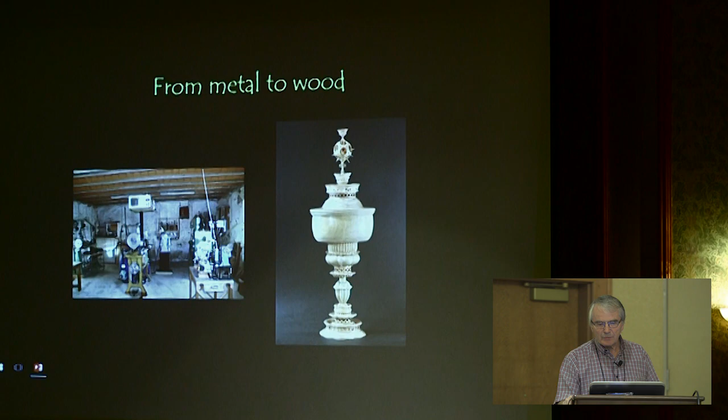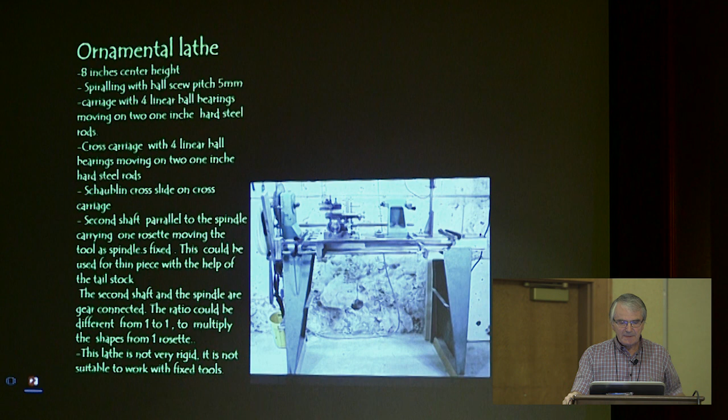So this is my ornamental lathe. It was a kit French lathe made of aluminum, and the base, the foot are made of metal sheet, and the bed is made of aluminum profiles. So I repeat, the center height is 8 inches.

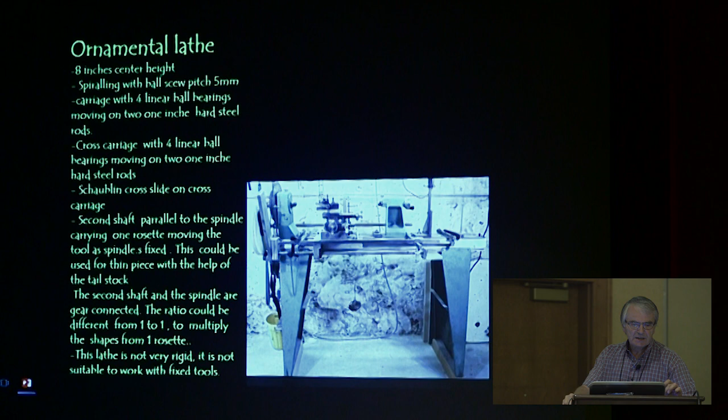I can, with this ornamental lathe, make spiraling. I have a ball screw with a pitch of 5 millimeters. The carriage with 4 linear ball bearings moving on 2 1-inch hard steel rods, it's not 2 inches. The cross carriage has 4 linear ball bearings moving on 2 1-inch hard steel rods.

I have on this carriage a Schaublin cross slide. I have a second shaft behind the lathe, which carries 1 rosette, moving the tool with the spindle fixed. Something is not clear here. This could be used for thin pieces with the help of the tailstock, because I have no rocking movement.

The second shaft and the spindle are gear connected. The ratio could be different from 1 to 1 to multiply the shape from 1 rosette. This lathe is not very rigid. It's not suitable to work with fixed tools. If you have any question, you can ask me. I will try to answer.

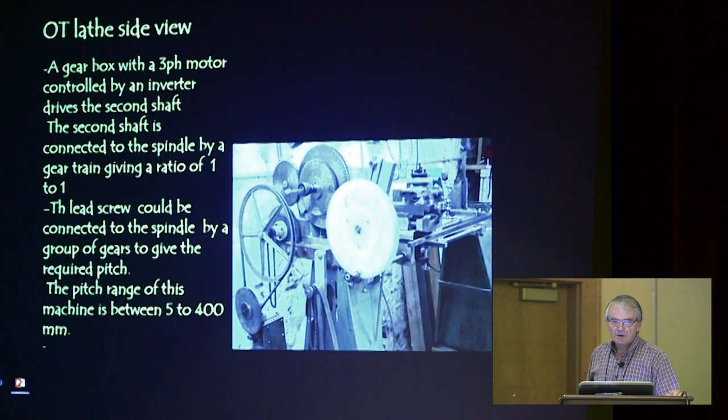This is the side view of the ornamental lathe. A gearbox with a 3-phase motor controlled by an inverter drives the second shaft. The second shaft is connected to the spindle by a gear train ratio 1 to 1, and the lead screw could be connected to the spindle by a group of gears to give the required pitch. The pitch range of this machine is between 5 to 400 millimeters, which allows to make a very long spiral pitch.

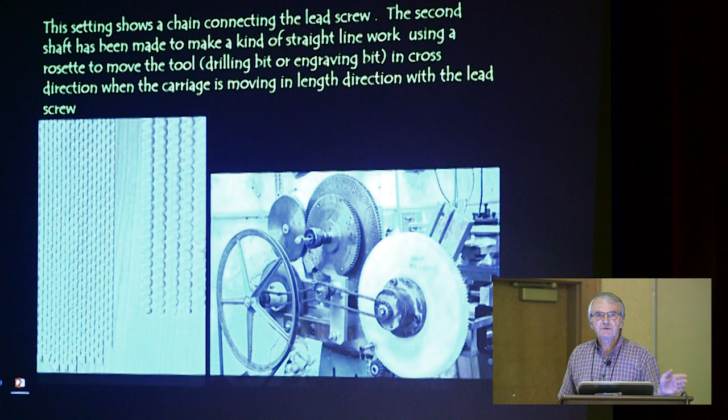Do you have any question? No, I continue.

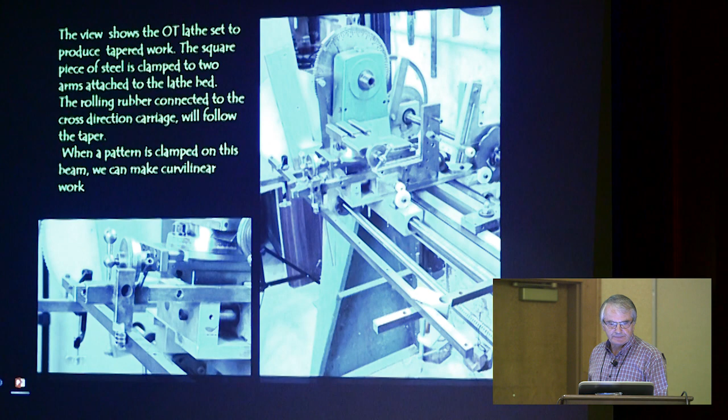The cross slide I use, at the beginning I have been using a very old cross slide coming from a French lathe. It was a bit worn out, and then I have bought a second-hand Schaublin cross slide, which is very good, probably equal to the American Hardinge you use, yes. It's generally used on a 102 Schaublin lathe.

We can sometimes find this kind of cross slide for about $500 US, but it's not very often. It's a very high quality level cross slide which works with an accuracy, a precision of a 100th of a millimeter, which is more than enough for woodworking.

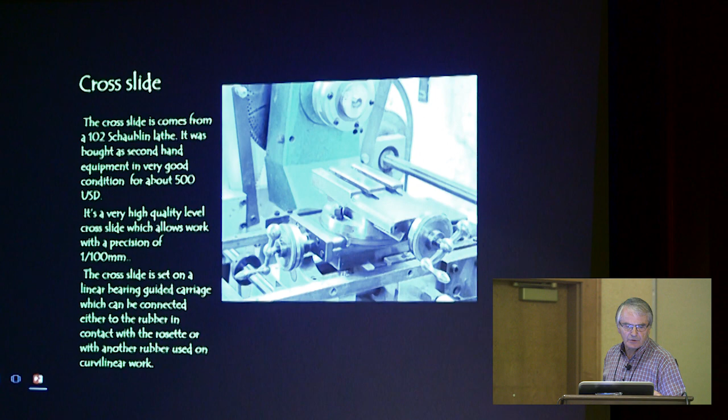The cross slide is set on a linear bearing guided carriage which can be connected either to the rubber in contact with the rosette or with another rubber used on the curvilinear work. This Schaublin cross slide has a tilting table which could be used in some special situations to set the cutting tool at the right angle or place.

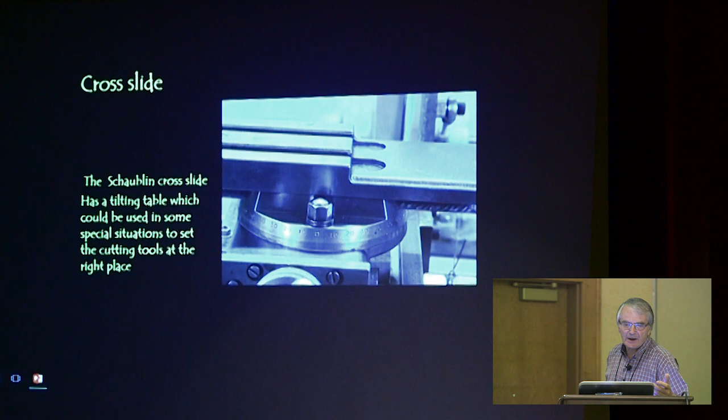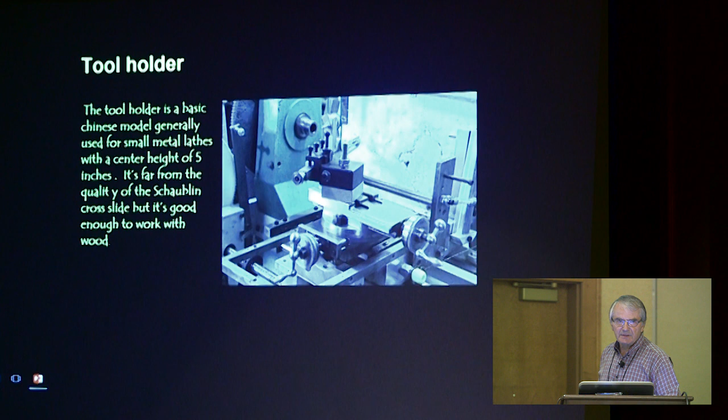The tool holder. The tool holder I use is a very basic and cheap Chinese model, which is generally used for a very small metal lathe with a center height of 5 inches. It's far from the quality of a Schaublin cross slide, but it's good enough to work with wood. I've seen that generally you use a stronger tool holder here, better than the one I use.

The universal cutting frame, mostly made of aluminum, except the high-speed steel homemade cutters. The thickness of the cutters is 3 mm and the maximum width is 10 mm. The center height is adjusted with the tool holder and the angle is adjusted by tilting the head. The aluminum block under the head is used to set the cutting frame on a rose engine.

The screw on the top of the head is used to set a sewing machine motor where the overhead drive is not available. I have an overhead drive only on my ornamental lathe, but when I use this cutting frame on my rose engine, where I do not have any overhead, I use a sewing machine motor, which is very cheap with high speed, easy to work with and easy to adapt.

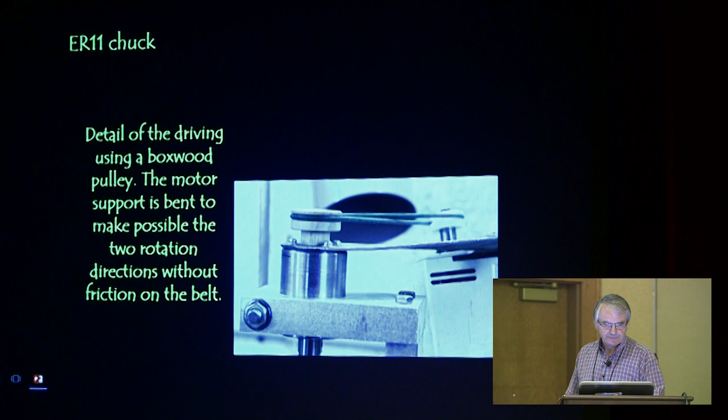This is another example of drilling chuck, which is a bit bigger. It's an ER16 drilling chuck, which could reach a diameter of, if I remember well, 10 millimeter, yes. Same system, I use the same frame with a 43 millimeter bearing.

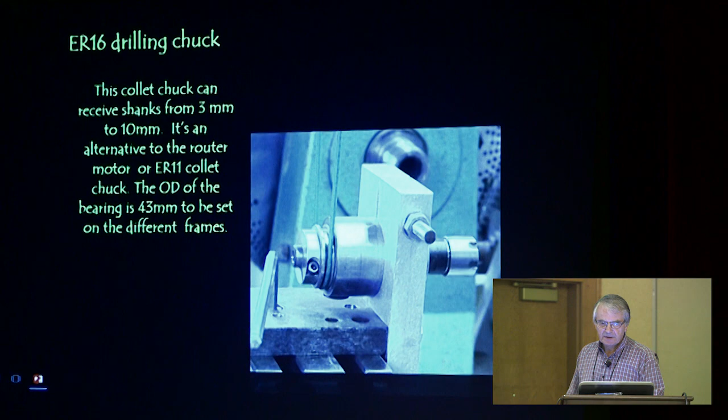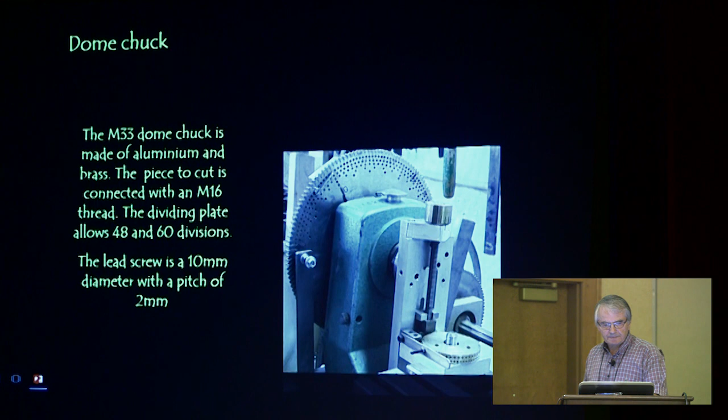Here it's my dome chuck. This dome chuck fits on the spindle by an M33 connection. It is a standard in Europe, and it is a standard I have used on all my lathes, plain lathe and also ornamental lathe. I use a dividing plate with two rows, one with 60 divisions, one with 48 divisions, and I can adjust the height of cutting to do that.

Here is my eccentric chuck, which is made of aluminum, steel and plastic. The connection I use for the dome chuck and for the eccentric chuck for the piece is M16. It's something easy to work. I can tap boxwood with an engineering tap without any problem. So this is what I use.

This eccentric chuck could have an eccentricity of 20 millimeter, and the dividing plate inside has 60 divisions. The travel of the eccentricity is made by a screw with a pitch of 1 millimeter, so I can adjust the eccentricity with good accuracy.

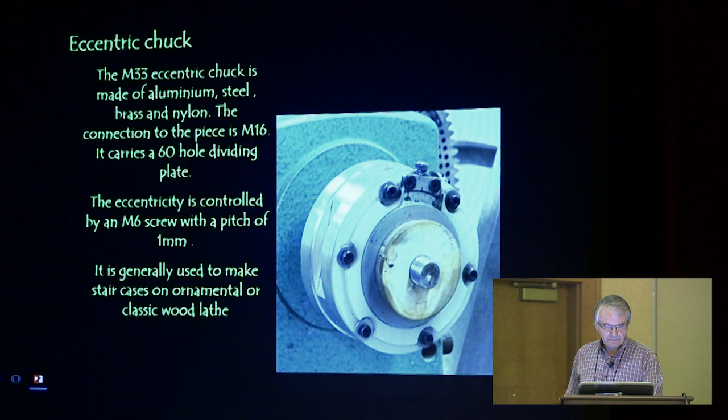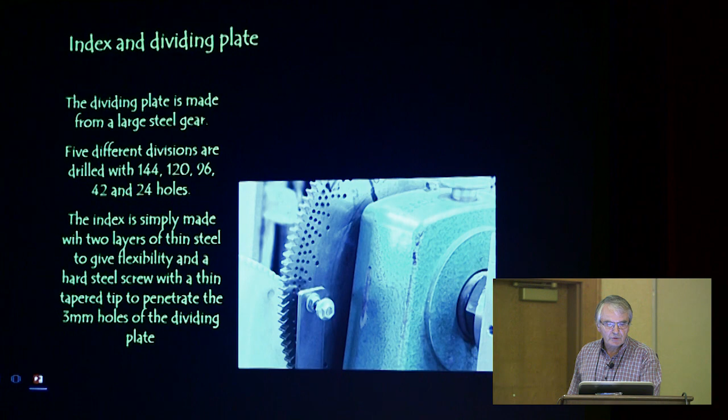This is the index and dividing plate. On the lathe, as a plate, I have used a big gear collected from an old machine, and I have drilled several rows of holes: one with 144, the second with 120, then 96, then 42, and 24 holes. The index is simply made with two thin steel bars, which are flexible enough, and a screw is used to go in the 3 millimeter holes of the dividing plate.

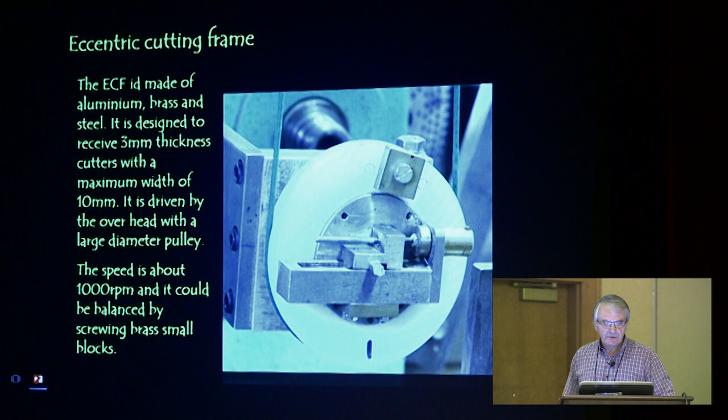Here it's the eccentric cutting frame I have made. It's a big plastic pulley, which can receive some balancing weight. The part which holds the tool has a capacity of 10 millimeter width for the tool, and I have a 3 millimeter threaded rod with a pitch of 0.5 to adjust the radius of the eccentric cutting frame.

Here it's another view of the cutting frame, which shows the pulley, the balancing weight, and the travel of the tool. This is a view of the milling attachment you have seen before with the router motor.

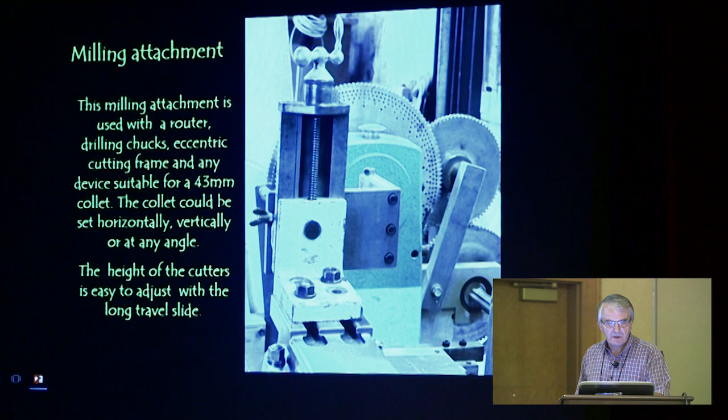The interest of this is I can work with it like a big universal cutting frame, on which I can move, change the angle, and move the center if necessary.

This is now how I work with this ornamental lathe as a rose engine. I have a second shaft behind the lathe, carrying the rosette. I did that in 2007 to make my first rose engine.

At the beginning, I used some plastic rosette made of perspex and cut with a laser cutter. The quality was good enough to work with a big diameter rubber.

So I used the second shaft, which I don't know the name of in English. It's not square, it's a shaft used on transmission for tractors and tools.

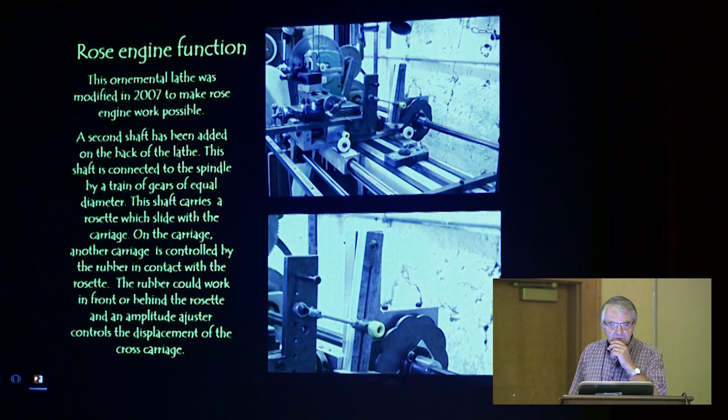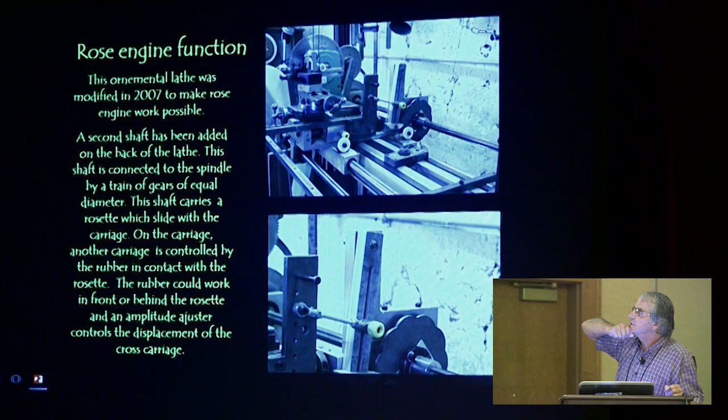I have the connection: the cross direction carriage is connected to the rosette by a threaded rod, and I can adjust the amplitude by moving the link. The link, connected to the rubber with a yellow button, can be moved up and down to adjust the amplitude of the travel.

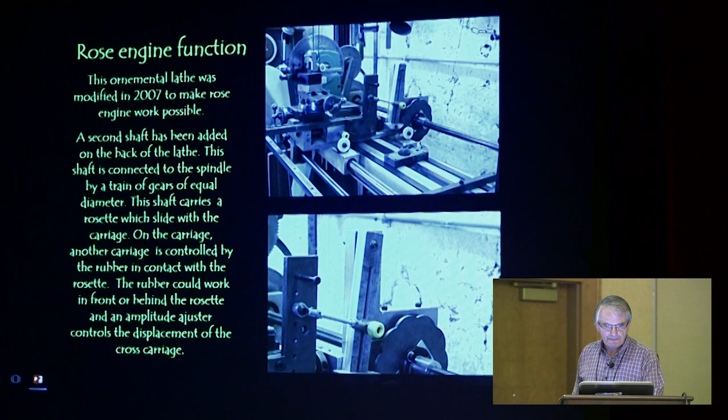To have a horizontal position of the link, I can move the link up or down through several threaded holes. With this device, I can adjust the amplitude from 20 to 100%, and it's rather accurate.

You change that yellow button on the rosette to different sizes? The yellow rubber? No, the yellow button isn't the rubber, it's just a button to tighten the position. The rubber is the piece of clear aluminium you have sharpened here. Ah, I see, okay, thank you.

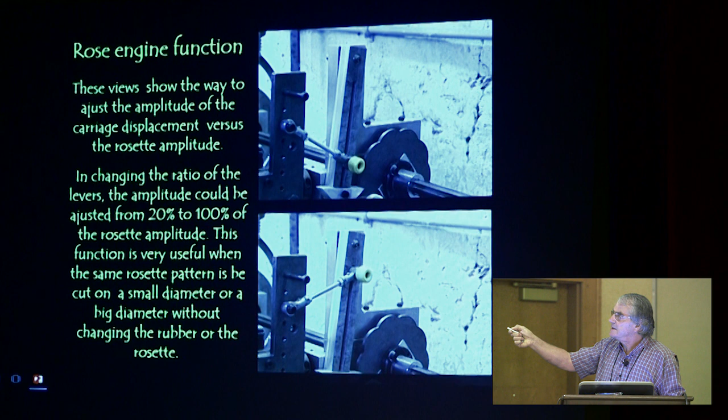Another interesting thing I can show you is this rubber could be set behind the rosette to have symmetrical shapes. In this case I just have to change the link for a longer one.

So we have now seen all the functions of the ornamental lathe, which was used from 2007 to 2009, also as a rose engine with flying cutters or drilling cutters. I never tried to work with fixed tools on this machine because it's not rigid enough.

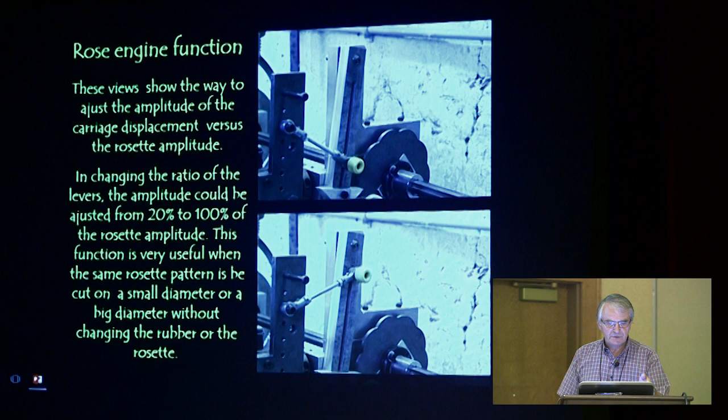In 2009, after seeing the limits of the rose engine I made with my first little lathe, I decided to make something stronger and more rigid. For that, I bought an old, very old Charpignon lathe.

First, because I was interested in the cross slide, which had a long travel of 6 inches, and the price was very low. I paid 450 euros for this lathe and cross slide in 2009.

When this lathe came into my workshop, I started working to turn it into a rose engine.

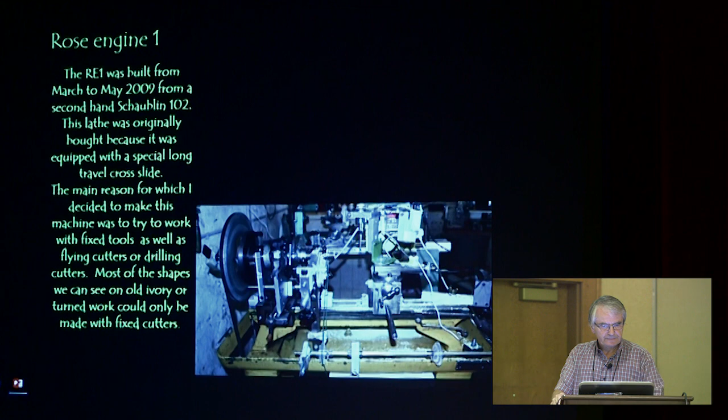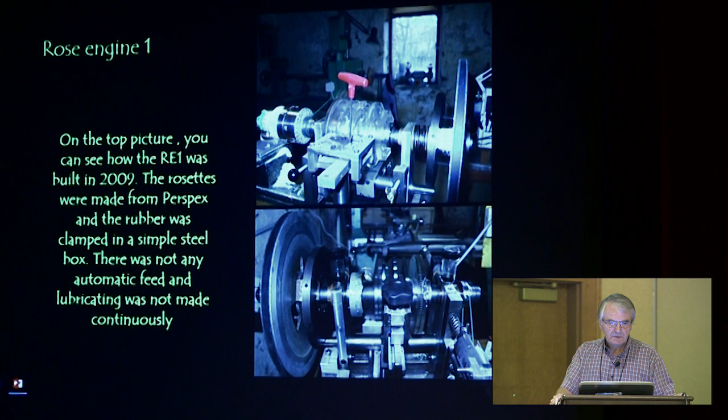At the top of the picture is the first design I made in 2009, with a rosette made of perspex, and the rubber was clamped on a steel box with screws. There was no automatic feed at this time. It was the first prototype, which I used for a few months before changing some tricks on it.

Below, you see the actual design of the machine now. The rosettes are made of steel, including the pumping rosette here, made from a steel pipe. The steel rosettes are generally cut by laser from 6mm steel plates. The rubber is clamped with a big knob here, and I have an automatic feed beside it.

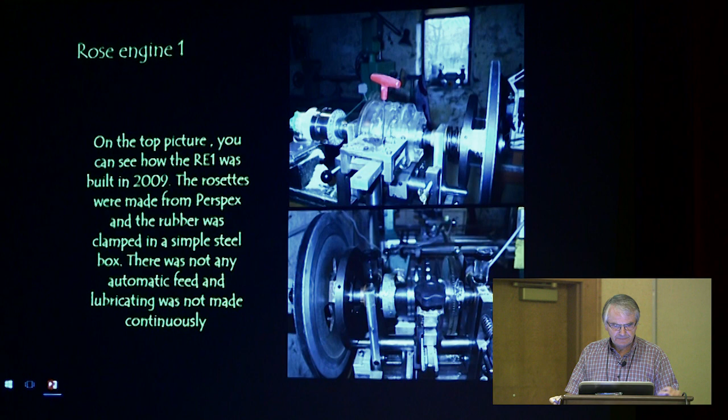In the beginning, I tried different things. I started working with very thick high-speed steel, but it was really difficult to cut the tools, and long, because I had many particles of metal to remove.

I also tried steel cut by standard tools like files or a milling machine, then hardening it using my furnace, but it was also slow, and I had some trouble getting the right hardness. So finally I decided to work only with 3mm high-speed steel plate.

I buy planer blades with a width of 35mm, and with that width I can generally make all kinds of tools I need.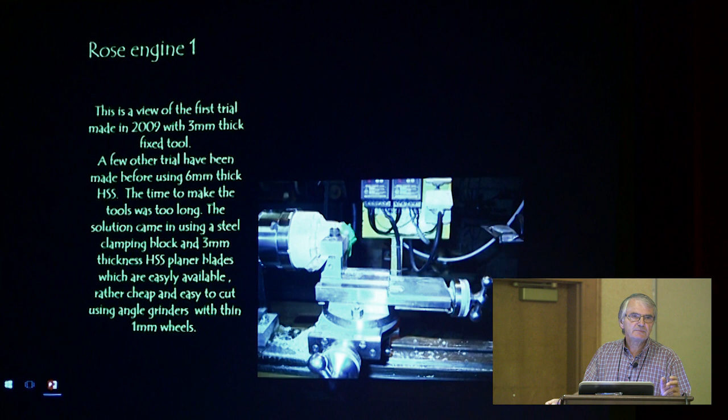Obviously, I cannot use any file or milling machine to cut, so I shape all my tools by grinding. For the first grinding I use a 5 inch angle grinder with a very small disc, generally 1 millimeter thick or sometimes less, 0.8 millimeter, to make details. Then I finish using another grinder that we will see at the end of the presentation.

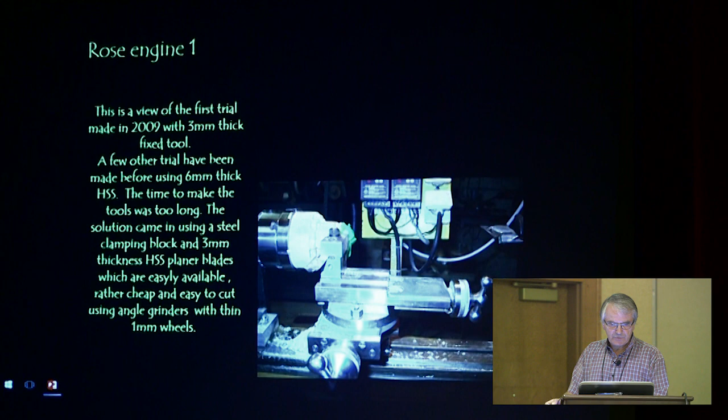On this, you can see the rocking frame, which is made of aluminum plates and contains bronze bearing. The bronze bearing here is split, and the aluminum plate is also split, so with a screw which is here, I can adjust the play to have no play between the spindle and the bearing. And on the top, I have used some plastic container to put oil and to give oil on the spindle. It's enough. After some years of work, I've not seen any worn out.

So I have a spindle which is a 30 millimeter diameter steel, hard steel for the second rose engine, semi-hard steel for this one. The nose of the spindle is M33 because all my machines are M33 with a pitch of 3.5 millimeter. So I can work on my plain lathe to make rough cutting. Then I move the chuck and the piece to another lathe, and I can work and change easily.

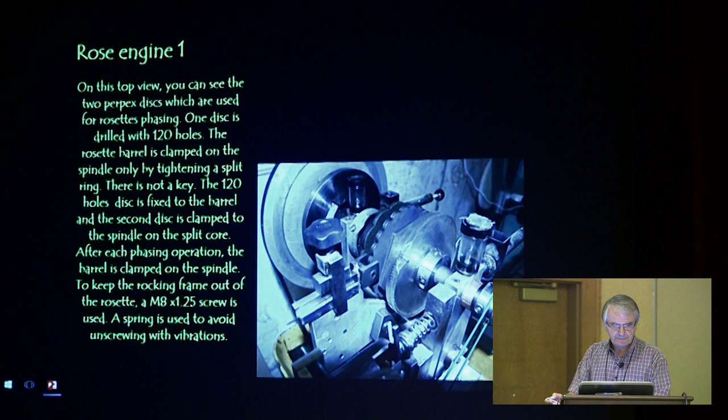This is an automatic feed which has been made after the construction of the machine. I use a 3mm green belt, same here. Here is the square shaft I have in front of the lathe, the rose engine. The driving is made from the spindle to the square shaft, and I have here a moving pulley which drives the gearbox. This gearbox is made with worm and wheel, homemade worm and wheel.

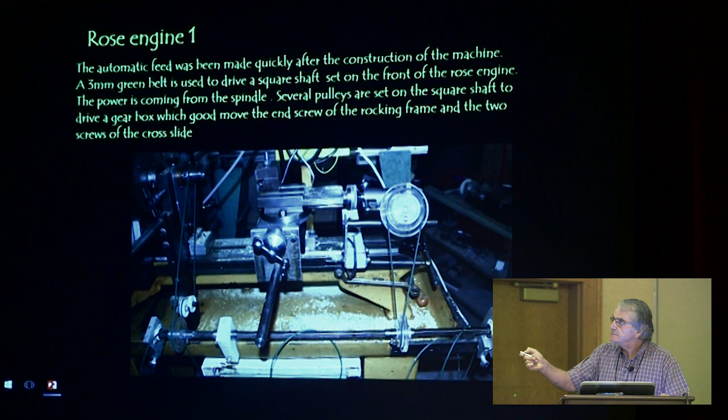I use a M14 millimeter threaded rod as a worm, and the wheel is cut with a tap on my milling machine. And it's very easy and quick to do, except when you want an exact number of teeth. Using directly the tap in the worm, you could have a difference of 1 tooth. But if you use a dividing table to prepare the cut, you have the exact number of teeth.

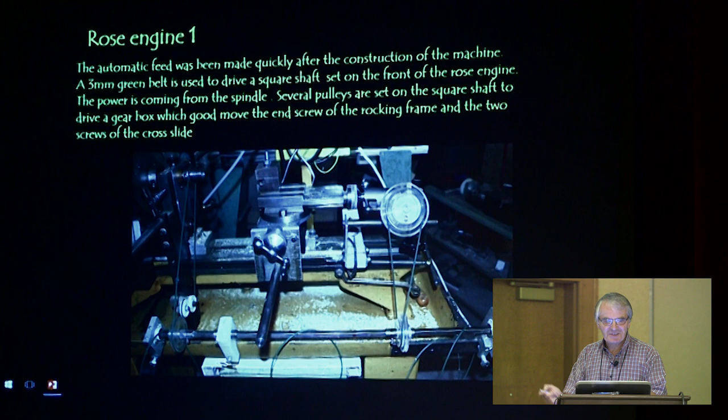About how much pressure do you have on the screws, the springs, to force the work? The spring to force the work, you will see on the next slide. About how much force? In fact, I've used the spring coming from the valve of motorbike motor, and I've used a series of maybe 3 or 4 in a pipe, and I have an adjustment of the strength by using a screw. So what kind of force is probably something like maximum could be 25 kilos, I think.

So this is the automatic feed in cross direction, but also in length direction. You can see the construction of the automatic feed. You have here the threaded rod, which is M14 millimeter standard threaded rod, a bit rough, but good enough. Two ball bearings here and here, 6 millimeter ball bearings, a pulley made of steel and perspex.

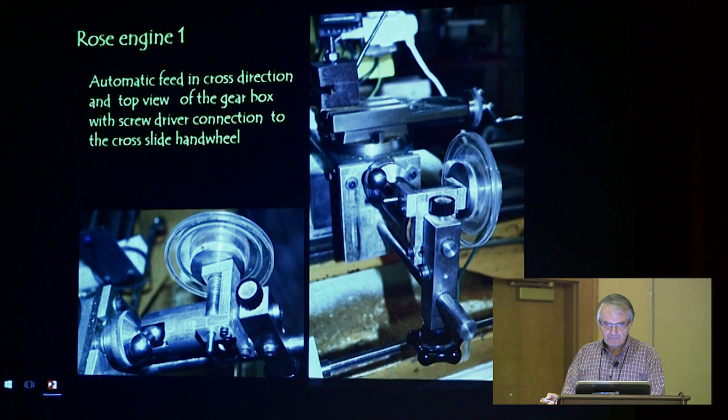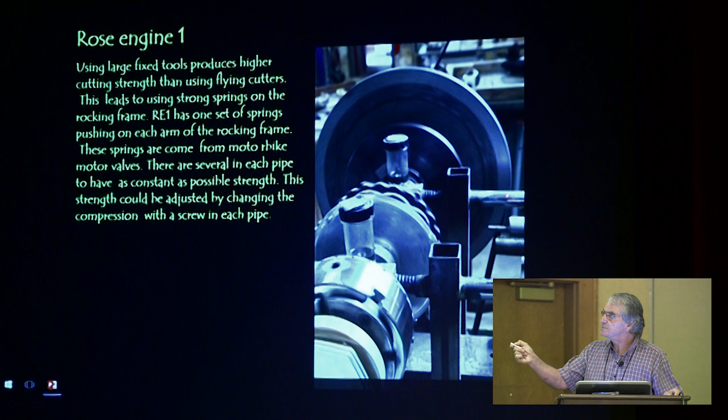This is another view showing the two posts with the springs. The springs are here. So in the pipe here, I have several springs in order to have a constant strength. When you want to have a constant strength, you should not use a very short spring, but a long one. This is what I do. And we don't see here the end of the pipe, but at the end of the pipe, I have a screw which is able to push the spring to adjust the strength. In fact, I have to adjust the strength and increase it when I use bigger cutters.

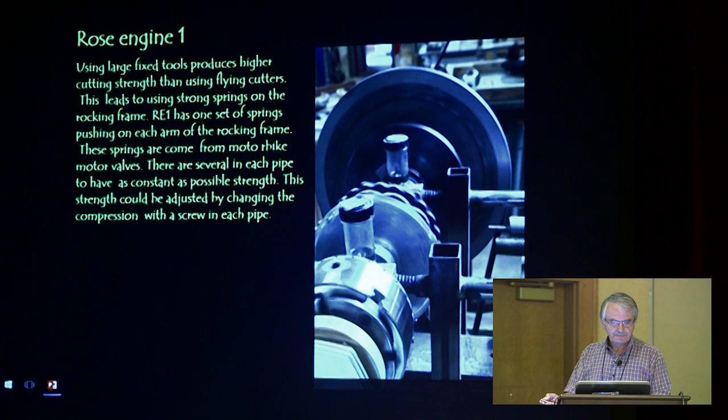So here you can see where? Here. The end of the pipe with a screw.

So here it's the rear, the flying wheel, which is driven by a half-inch V-belt. Beside, you have a plate. This plate is a swash plate, which could be angled to make swash work. And the spring here is to keep the spindle in the rear position.

Oh sorry, here it's a side view of the machine. You can see the yellow frame of the old Schaublin engine, and I have an intermediate shaft on the side of the frame. I have first the long driving V-belt here.

Here, the intermediate place, I have a motor here on the side, which is a worm and wheel gearbox with a three-phase motor. It's a 250 watts three-phase motor driven by an inverter. And the first stage is I can change the belt also, but generally I don't use this second pulley.

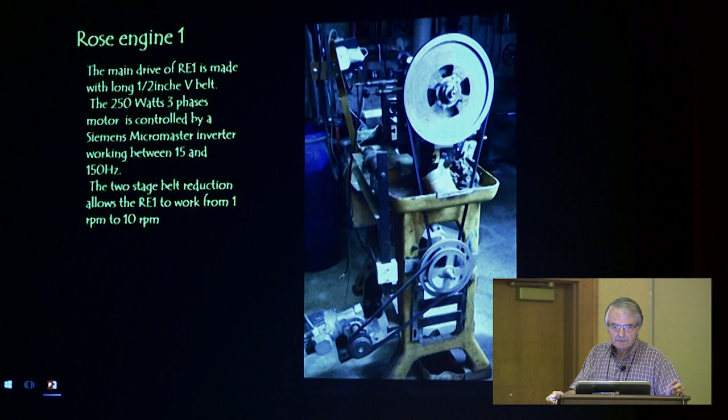Here I show the work of a hexagonal box. So to work with a hexagonal box and to have flat faces, it depends on the rosette diameter and the piece diameter. So if you have no amplitude adjuster, you could have trouble if you want to make a box with a different size, a different diameter of rosette. So here, to finally get the flat side of the box, I use my amplitude adjuster, which is a personal construction, a bit special.

I've spent a few hours to find a way to do it, because my problem at the beginning was using for the same shape two kinds of rosette: one rosette with a certain amplitude for big diameters, and the same number of bumps, for example, with smaller amplitude to work on small diameter. Because you cannot use a very high amplitude when you make a small diameter. When you want to make the body of a piece, you should use a rather big amplitude, but when you want to make the stem with the same shape, you cannot use the same amplitude. So it's necessary to have either two kinds of rosettes or to use an amplitude adjuster.

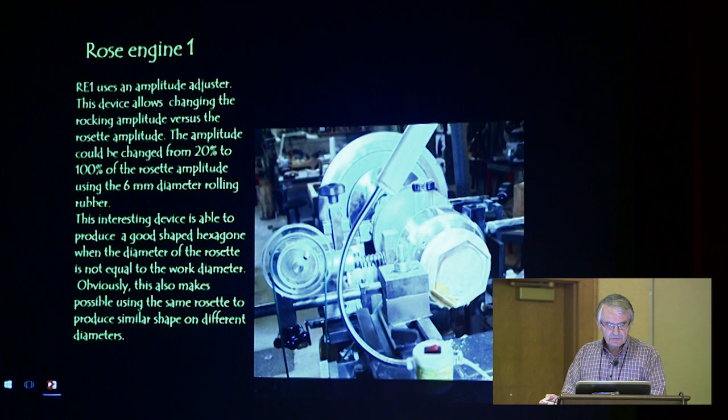And now I think I could not work without this equipment. And I have also made another one for the pumping.

For the pumping direction, I've made another amplitude adjuster, which is not with continuous adjustment, but using a link. So I can move this link. I have different positions: 1, 2, 3, 4, 5 different positions, each corresponding to a step of amplitude adjustment.

So I have a follower here, which follows a rosette, and I have here the rubber. The rubber is a 6 millimeter rod rolling on 2 ball bearings, which is in contact with the pumping rosette here.

So instead of having a continuous adjustment as I have on the working direction, I have a step-by-step adjustment, which is more than enough, and it's easier to build.

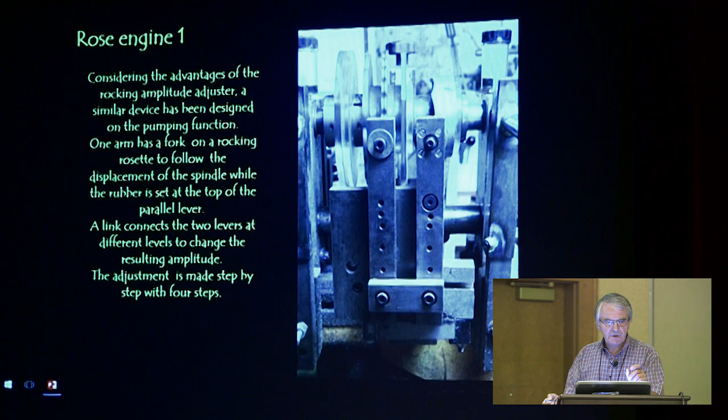So I have all the fulcrums as ball bearings. I use a standard ball bearing with an inside diameter of 6 millimeters, outside 15, and a width of 5 millimeters. I buy this kind of bearing by the hundred.

This picture shows the hexagonal box being worked with a fixed tool, and here I am hollowing the box. I have a hollowing bar, and at the end of it I clamp a piece of 3 millimeter high-speed steel cutter, with the angle close to 90 degrees, to finish the bottom as perfectly as possible.

I use the automatic feed all along the hollowing, except at the end, where I finish slowly using the cross slide to get it as perfect as possible on the bottom. I don't use hand tools for this; the first hollowing is made on a lathe with a cross slide for better accuracy in cutting and finishing.

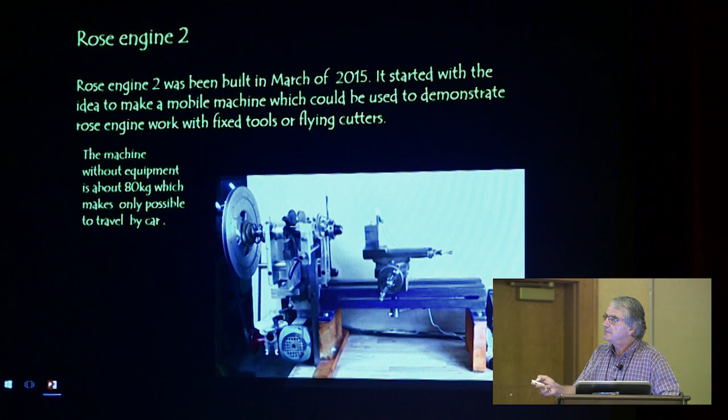It's something with a weight of 80 kilos, which could be dismantled into 3 big parts. One big part is the cross slide, a very heavy cross slide coming from a kind of lathe used to adjust cams on automatic metal lathes. The weight of this is probably 20 or 25 kilos.

Then besides that, I dismantle all the rocking frame. I also dismantle the motor. And the frame, the bed of the machine, is coming from a small bench lathe, a metal bench lathe.

I use also the same kind of inverter, which is a Siemens inverter, here.

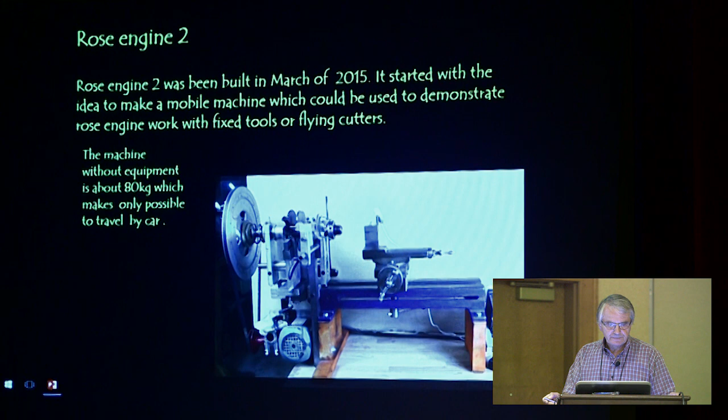It's 176 pounds. 80 kilos? It's 160, no? 176 pounds. Okay, okay.

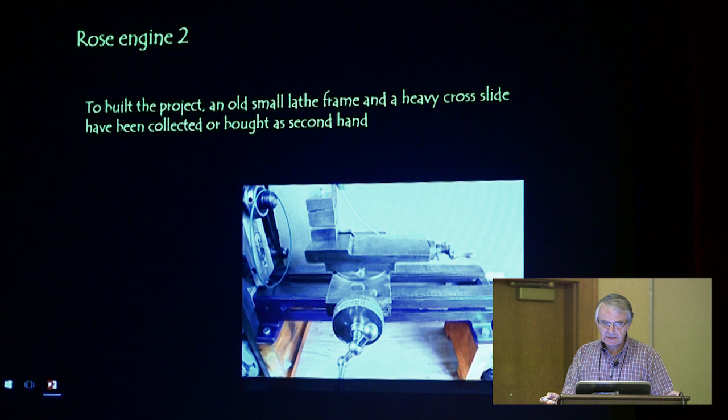So to build this project, I started from the heavy cross slide, which I bought second hand. I think I paid 200 for the cross slide along with the machine beside it. And finally, I think the total I've spent to make this second rose engine was roughly 1,000 euros.

So here is the engine: the motor, the gearbox, and the driving setup. I've made something very simple — the frame of the motor and gearbox slides with a square pipe on another square pipe, which also gives the tension of the belt.

The gearbox is a Chinese gearbox. I paid 50 euros, delivered to my home. It's good, but there is a small play in the gears, which could bring some trouble when we work.

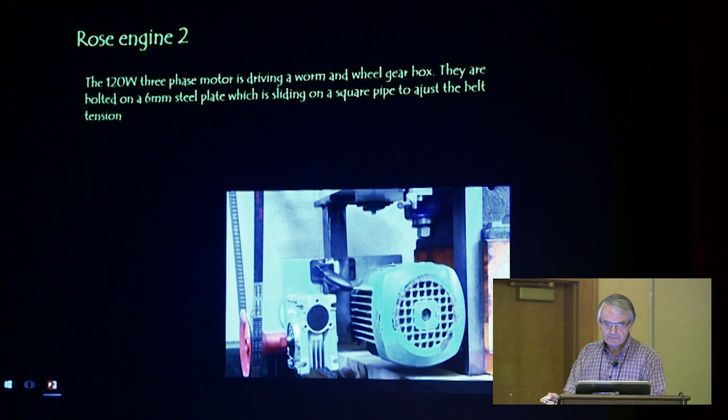This is the tension adjustment with a square pipe sliding on another square pipe, and just above here you can see the fulcrum of the rocking frame. It's just a simple, standard mechanical piece, which aligns automatically without a hard point.

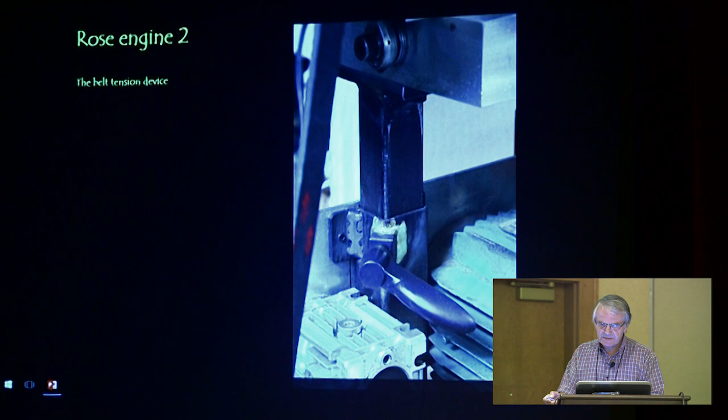The motor is 120 watts, 3-phase, 4 poles, and the gear ratio of the gearbox is 1:50.

The aluminum flywheel is probably the sister of the aluminum flywheel from the other Rose engine, and it came from an old washing machine. So you can imagine all this equipment was free for me.

This is the first step of connection between the motor and the gearbox. It's made of boxwood pulleys set on a steel center with two levels to change the speed, and the belt is a round belt with a diameter of 6 millimeters.

And it runs a very long time without any trouble with the connection breaking.

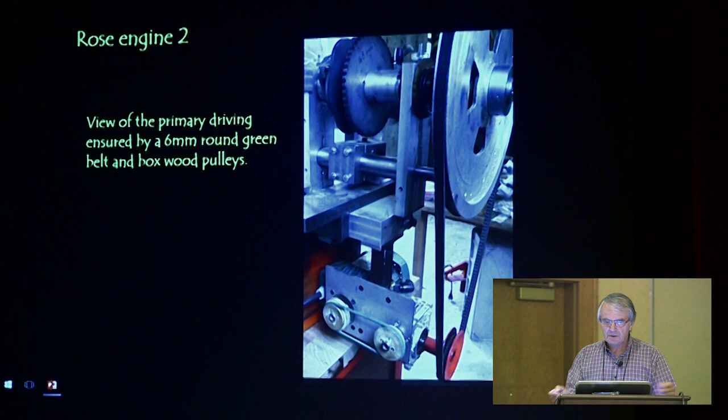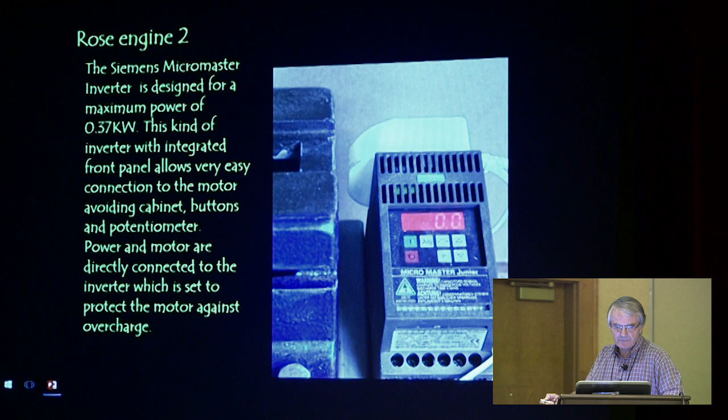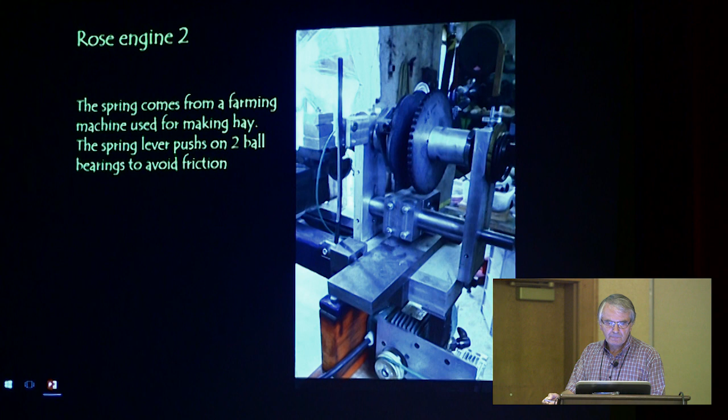Here is the pulley which drives the automatic feed, and behind you have the detail of the pivot we have seen before. It's male pivots with a thread inside the plate. You can see here the detail of the plate, which is split here, and we have a screw here to tighten the connecting bar.

This is a connecting bar between the two plates, because obviously I did not make any cast iron piece, because I don't have any foundry in my home. And behind you see the spring. To adjust the tension of the spring, I turn this piece with a wrench here.

This is the view of the automatic feed, which is the same as the one we have on the first Rose engine. You see here the screw, the end screw, the spring which is here to avoid the unwinding of the screw with vibrations. And here you see the screwdriver, which is a pipe split in two to be connected to the screw.

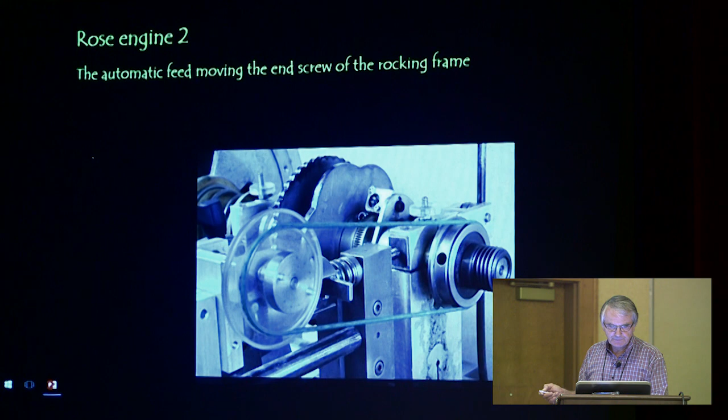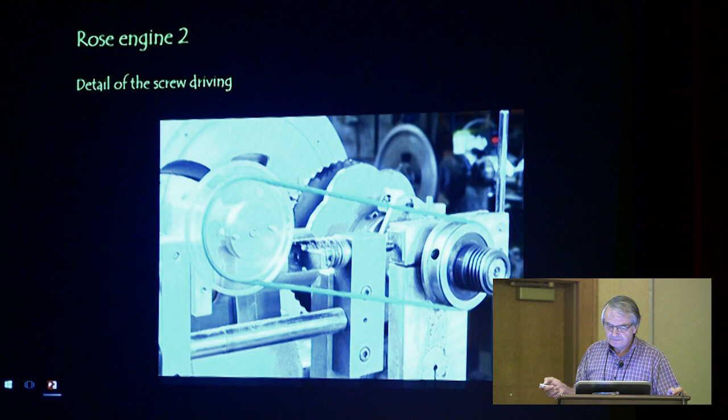Another view of the screwdriver here. The spring keeps the spindle in rear position. Inside the boxwood plate, I have a ball bearing, which makes the spring free to avoid turning.

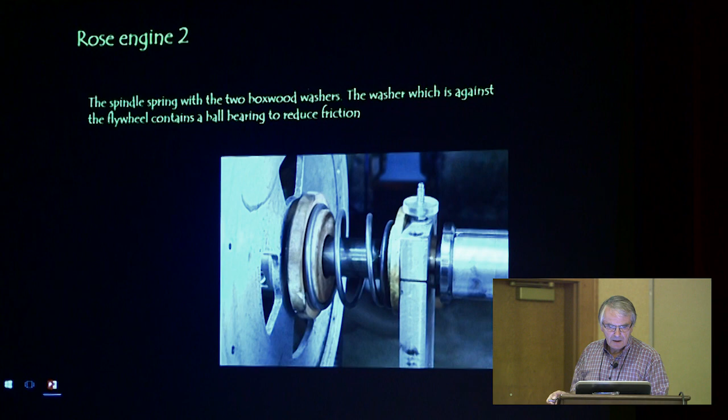I have a 90 tooth worm. That means for one turn of the screw, I have 4 degrees. So it's easy to have an accuracy of 1 degree, which is enough to do phasing on wood. Maybe it's not enough on metal, but I have no experience in metal.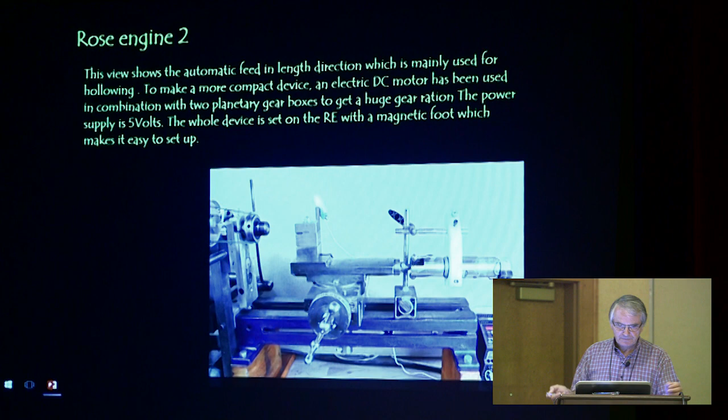This is a motor with planetary gearboxes, which I got at a SOT auction for a few pounds. I use a 30 volt direct current motor supplied by a phone electric supply, though with a very low voltage, so I have a very low output here. I don't know exactly the gearbox ratio, but it's probably something around 1 to 500 or something like that. The motor speed is reduced because instead of a 30 volt supply, I use 5 volts. I can reverse the direction of turning by changing the connection, as it is DC current.

So this is the cabinet I've made under the table of this Rose engine. It's something I got that was used to organize paper sheets in a library, so it has long drawers. In these long drawers, I have put all my tools for Rose engine work, and sometimes for screws and so on.

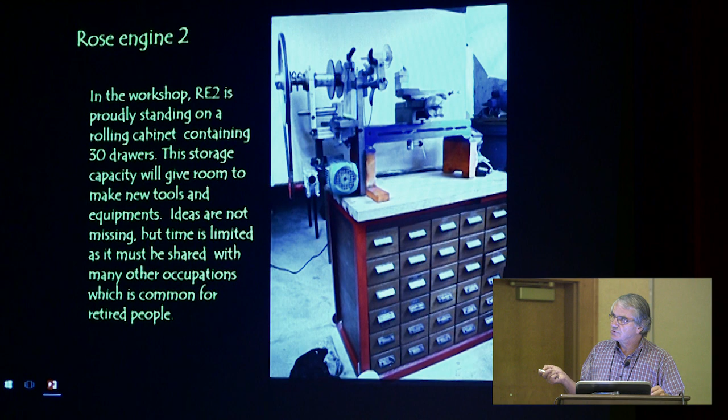This is another machine, because we have finished with the Rose engine and ornamental lathe. And beside, I have separate equipment. This one, for example, is used to make thread. I have a router here with a cutting tool with a 60 degrees angle.

Here I have an old cross slide. It's the first cross slide I got for my equipment. It's something which is not as accurate as the Schaublin, but it's good enough to make threads.

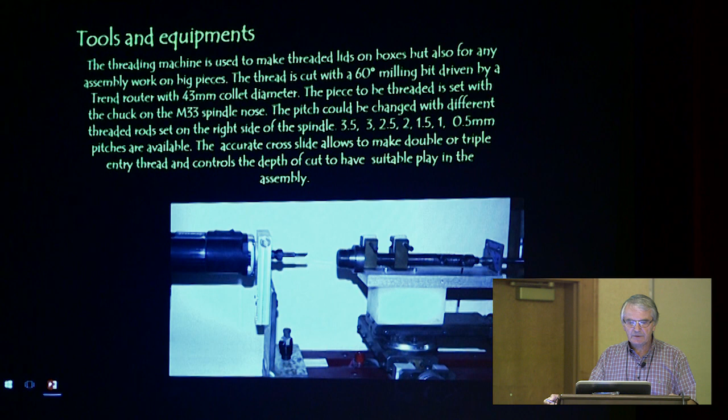I have here a spindle with always an M33 times 3.5 thread, and at the end of the spindle, I can change the mother lead screw thread. I have different threads with a pitch of 3.5, because when I want to make a special chuck for my lathe, I can use my threading machine. I can also use 3, 2.5, 2, 1.5, 1, even 0.5 millimeter when I want to make, for example, a thread for pens; 0.5 could be used.

This kind of equipment allows to make thread in any wood. And it's very accurate because I have here on the cross slide the same capacity of accuracy as the one I have on the Schaublin, except it's a bit worn out.

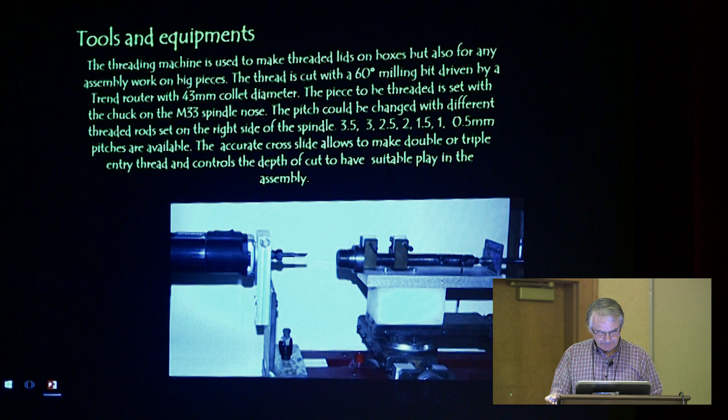This is another view of the threading machine. And you can see here I have a special coupler to make smooth movement and to avoid hard points. The construction is a bit rough, but this is the last evolution of the threading machine. And from time to time I change it because I have to improve either accuracy or something else.

How do you index to get a triple? Because I have the second slide in this direction. If you want to make a double entry thread, you move here by half of the pitch, simple, or by a third if you want a three entry thread.

Here it's a view of the box containing my fixed tools. I have probably now 100, and each time I start a new piece, I have to make new tools. So you can see the tools. It's different kinds of shapes: male, female, concave, convex, straight.

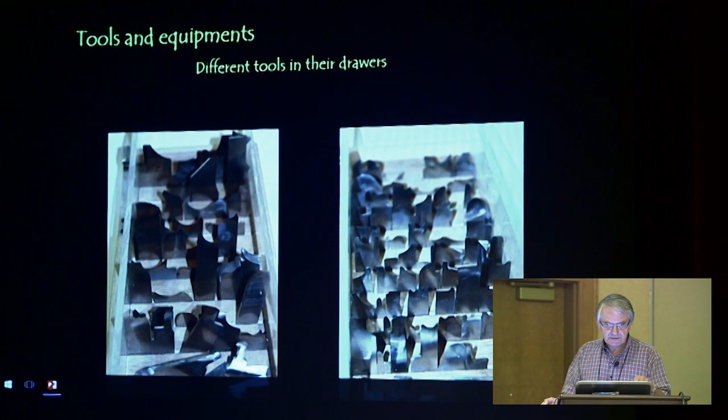Here you have the hollowing bar, where you see here the small grain, which is used to have a good connection between the side and the bottom.

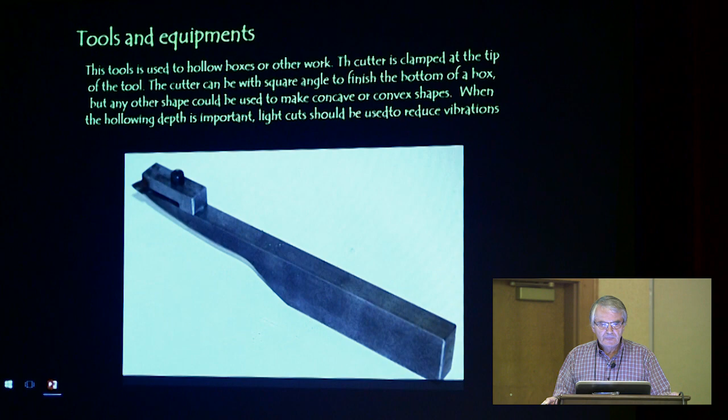Here it's a detail about my tool holders. On the right side, you can see the standard tool holder, which is a block of, in fact, 2 inches times 2 inches times 2 inches. And I clamp the 3mm tools in order to have the minimum outboard of the tools to avoid or to limit vibrations.

And on the left side, I have another tool holder, which is a tool holder where I can give an angle to the tool to make an angle cutter.

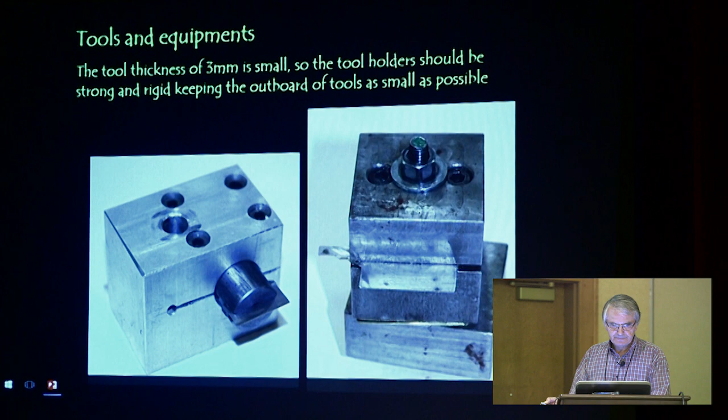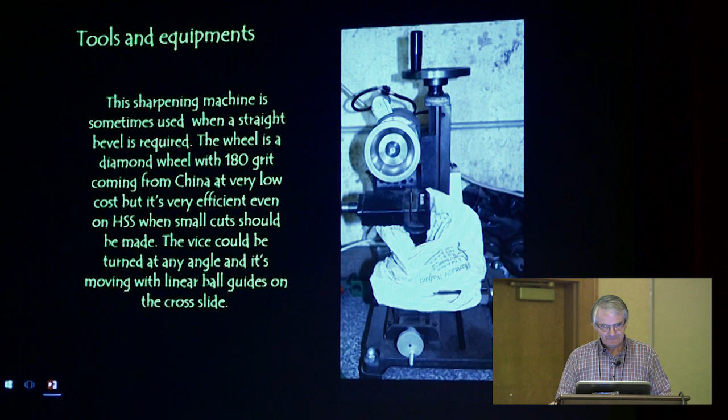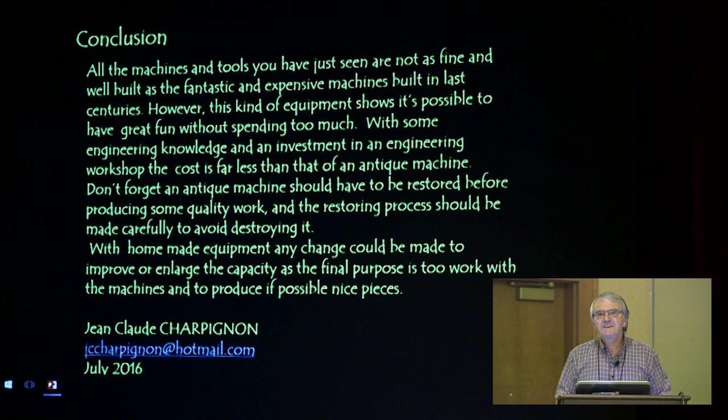Fred has a question back here. What RPM do you generally find is amenable to this work? With fixed tools, the RPM is between 1 and 10 rounds per minute, depends on the diameter. The other question is, what kind of included angle on the cutters? 20 degrees bevels.

20, and after grinding, I finish with leather polish, leather and paste, to try to have a mirror polish. If you do less than 20 degrees, you have quickly cracks on the cutting edge. I know Jeremy Soulsby is using sometimes 15. I've tried 15, but trying 15, I have had very often cracks very quickly.

So I decided to increase the bevel angle to 20, even 22, 25. It depends on the shape, in fact. It depends on the depth of cut of the bumps. If you have a very deep bump, you should go with very small angle bevel. So this is also the interest of having an amplitude adjuster. You can reduce the amplitude when you see your angle is a bit too big.

Thank you. You are welcome.